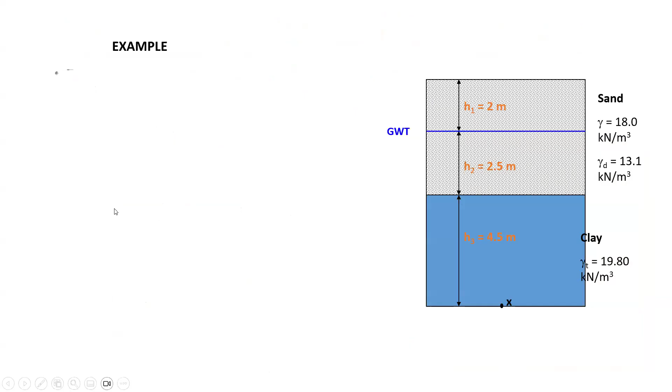Then we moved to a very important topic, the Boussinesq theory. I hope you all can remember that. So this is the approximate method, where we discussed that due to external structures, the stress distribution can be evaluated using the 2-to-1 method, or approximate method. Using this method, we can evaluate the stress at any given point below the external structure.

Actually, what we said was the results coming from this theory can still be used in civil engineering applications, but the safety factor of the result is high, so it is more conservative. The structures will be larger if we use this theory. Whatever soil improvements or conclusions are made, they will be more conservative using the 2-to-1 method. Then we discussed one of the major important theories, the Boussinesq theory.

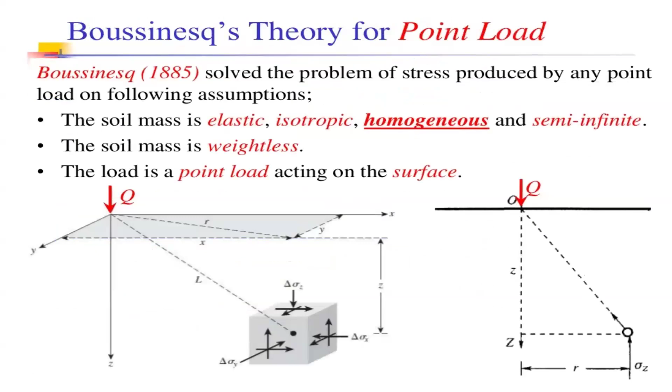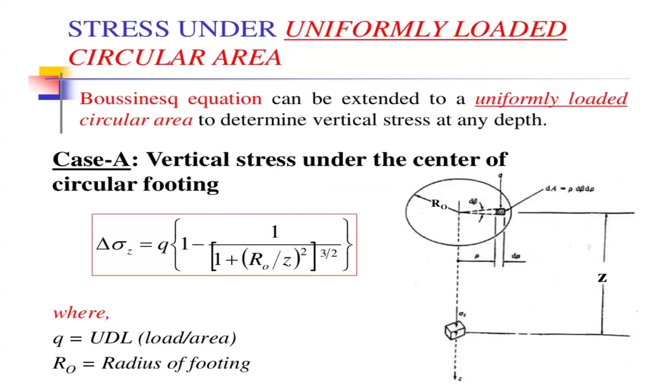So for the Boussinesq theory, we studied that it has been derived for point loads, and this is the equation for point load. Then it was further developed for line loads, and for rectangular area loads and circular area loads. We discussed all these things.

We also discussed a few examples for rectangular area and circular area as well. What I said last week was that we would discuss some examples for rectangular area loading so you get an exact understanding of this theory and how it can be applied to evaluate stress distribution below a rectangular loaded area. So today we will discuss some practical problems so you can get used to this theory, and since this area will definitely be assessed during your exam, you should have a proper understanding of it.

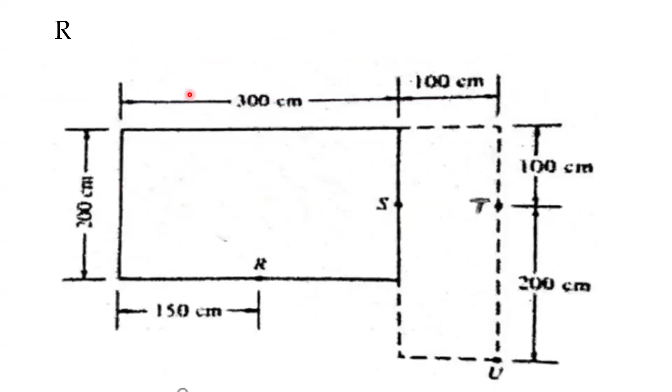So in this situation, for point R, you have divided this area into two. Our requirement is satisfied because this small rectangle has one of its corners coinciding with the point of interest. Now our requirement is okay. So what you have to do is get the dimensions of this small rectangle. The length is 200, width is 150.

So what is M? What is N? M is B over Z, and N is L over Z. Capital L is the length. So in this situation, for this small rectangle, what is L? 200 centimeter means 2 meter.

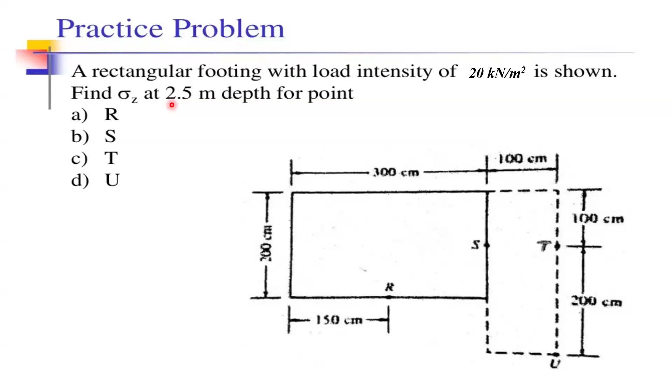So L is 2, Z here is depth 2.5, so L divided by 2.5. The width is 1.5 and Z is 2.5, that is the depth. So B over Z is 1.5 divided by 2.5. L is 2, Z is 2.5, so 2 divided by 2.5.

So if you know the M value and the N value, you have to refer to the graph to find the I value. If you know the N value, you go up until you find the corresponding M value. Once it is intersected, you go horizontally and find the corresponding I value. That's what we did here.

I value is 0.125. Applied load is 20. 20 into 0.125, that is the delta sigma Z of this small rectangle, because the dimensions 2 meter and 1.5 meter are for this small rectangle.

But here the similar dimension is available for this rectangle as well, so you have to repeat the process once again: 2 meter, 1.5 meter, depth 2.5 meter. You calculate the simple M value, the simple N value, then the similar I value.

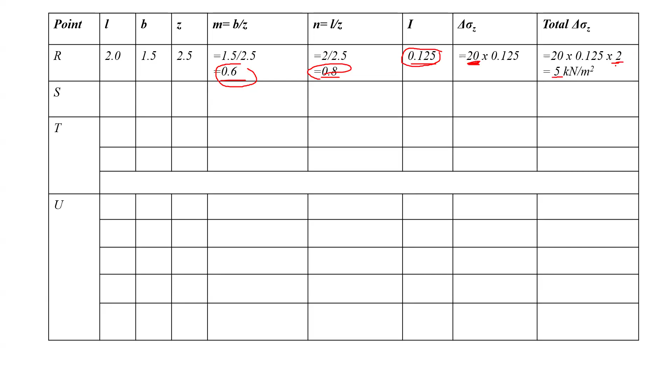Hello? Understood? Yeah sir. Then total sigma, that is multiply by two. If two rectangles, okay. Yes, actually I think my voice is not heard by you because I have been muted. Sorry, so I will repeat here.

But the problem is you have calculated this I value for these dimensions: L is 2.0, B is 1.5. This is for this small rectangle, the length is 2 meter, width is 1.5 meter. So what you have calculated is the influence value, I, calculated for a small rectangle.

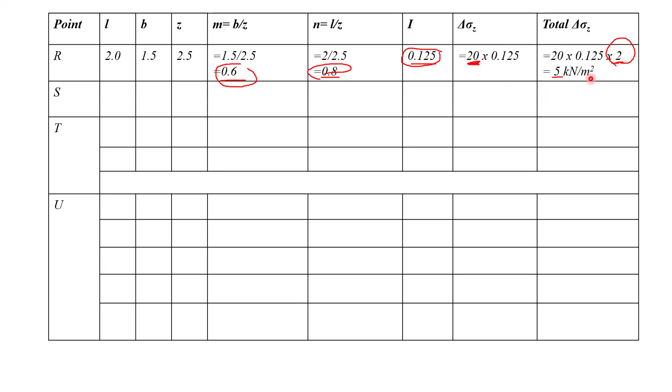That's why you have to multiply by 2. In case you don't have another rectangle, you don't need to multiply.

Our main reason to divide these rectangles is you have to use this graph in case one of the corners of the loaded area should coincide with the point of interest. But here, our point of interest is here, and the corners of the rectangle area are not coinciding with the point of interest. That's why we divided these into two rectangles at this point.

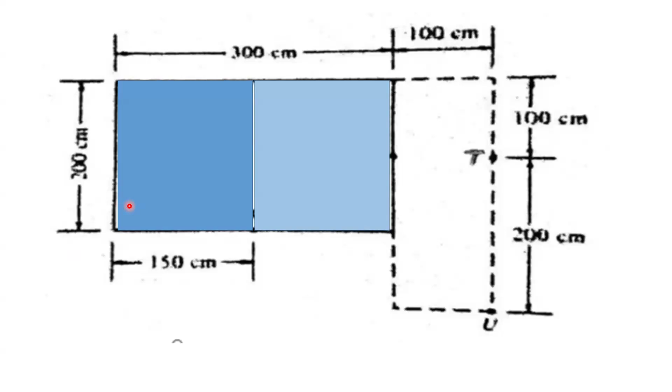Now your point of interest is point T. Your loaded area is somewhere here, which is inside. Your point of interest is outside the loaded area. So this is the plan area.

In the plan area, only this area is the loaded area. Now you have been asked to calculate the vertical stress increment somewhere which is outside the loaded area. So in that situation, how to divide? Then you have to think. So this is the way I will show you.

So first rectangle, you mark like this. Second rectangle, you mark like this. Now you may wonder why this area is more than the loaded area.

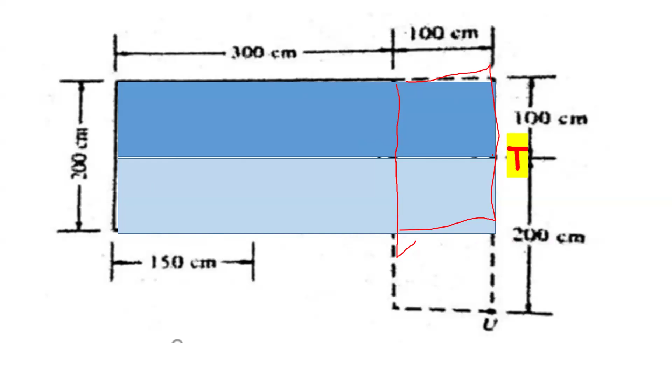So now I have additionally considered this area. So what I have to do now is deduct this area. This is the additional area which I considered, and this is another additional area which I considered.

So now what I have to do is these rectangles also should be drawn in a way that one of the corners coincides with this point T. Then only you can use the graph. So you cannot take some entire additional rectangle and then deduct it. What you have to do is, even for deduction, you have to select the rectangle in a way that one of the corners coincides with the point of interest.

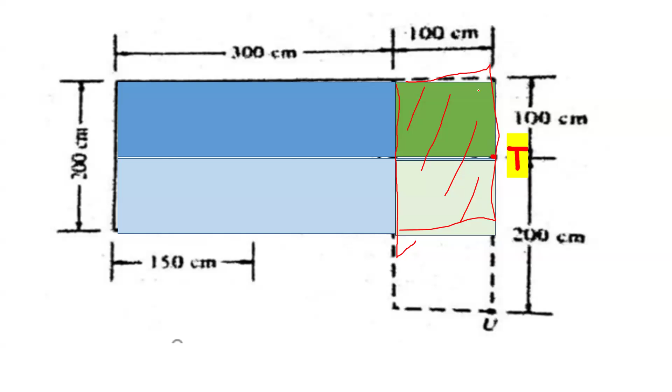Now another point, U. It is also outside the loaded area. Loaded area is only this area, no? So this is the loaded area. Point U is somewhere outside.

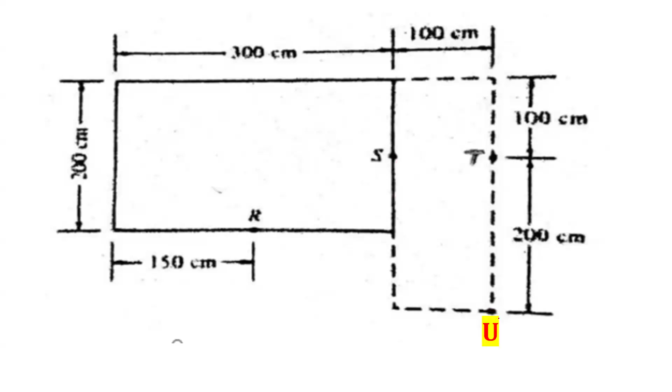So how to do it? We have to consider this big rectangle. One of the corners of this big rectangle is coinciding with the point of interest. So you simply apply the n value, the m value, and use the graph and evaluate.

Is your answer correct? No. Why? Actual loaded area is smaller than this area. So if you give the answer like that, then you have increased the loaded area, which is not the actual situation.

So what you have to do now is deduct the additionally considered area. But for the deduction also, the selected deducted rectangle, one of the corners should coincide with this point U, which is the desired point here.

So this point U should coincide with the deductible rectangle area as well. How to do that? You see, I deduct this green color rectangle, and again I deduct this rectangle as well. So that this will be the resultant.

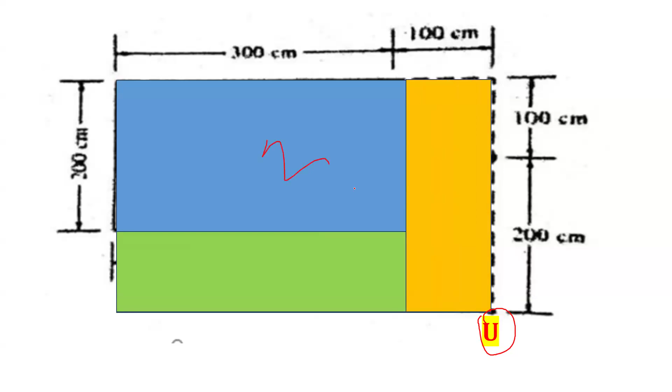Okay, my requirement now satisfactory. Before that, very first thing, I draw a big rectangle so that the corner is coinciding here. So now I know I have considered certain additional area, so now I am going to deduct that additional area.

But I have to think how to draw the deductible rectangle, because a corner of the rectangle should coincide with the point of interest. So I decided this rectangle, one of the corners coinciding with point U. Again, I draw this rectangle, that rectangle also, one of the corners coinciding with point U.

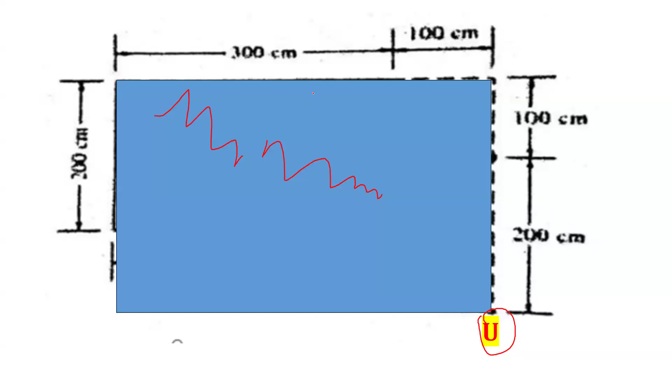Now what you have to do is, first you have to evaluate simple m and simple n value for this one and check the graph for I value, multiply by sigma so that you can calculate the sigma z. And then you have to evaluate for this small green color rectangle - check for simple length, go to the graph and find I value, and then multiply by sigma surface contact pressure, so that you can evaluate the vertical stress at this point.

So then you have to calculate for this orange color one. So that is also possible. Now what is the mistake now? Can somebody tell me, is there any mistake?

There's a mistake. What's the mistake? We have deducted this area 2 times.

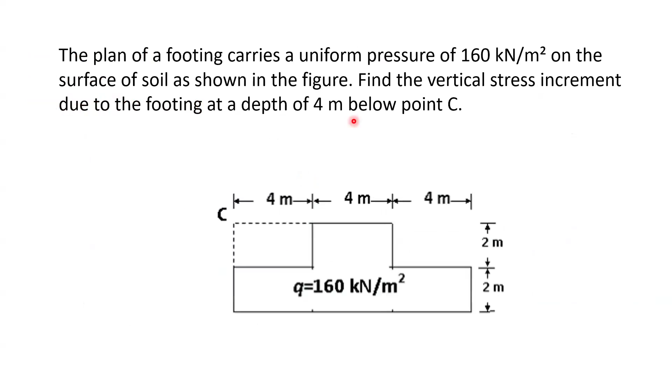What to do now? Simple M value is B over Z, and simple N value is L over Z. So L is here 12, and Z value is the depth. What is the depth? 4 meters below. So 12 divided by 4, that would be 3.

And in this rectangle, simple M value, B over Z. Simple M value is 2 plus 2, that is 4. 4 divided by 4, M is 1.

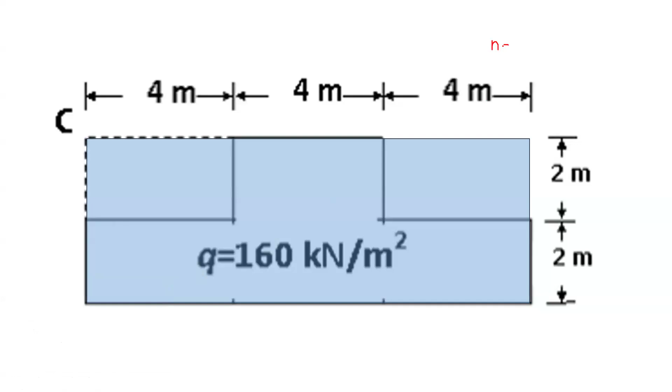Now, simple N is L divided by Z. L is 12, depth is 4. So 12 divided by 4, that would be 3.

And simple M, 2 plus 2, it is 4. 4 divided by 4, that is 1.

So if you know the simple N value and simple M value, simply you can use it at the graph. Now here, simple N value we got it as 3, simple M value we got it as 1. So you go up, up, up, up until you find the corresponding simple M value.

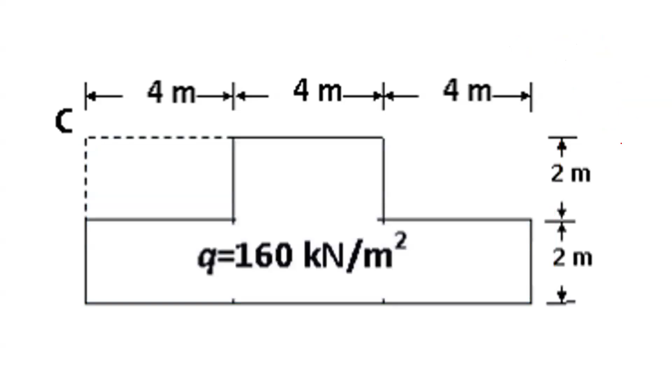0.202. Now your sigma value here is 160 kilonewton per meter squared. So now what you have to do is sigma value equals I into contact pressure, sigma naught. Actually, last week we discussed this one. So I value is 0.202 into 160. So you get the final answer.

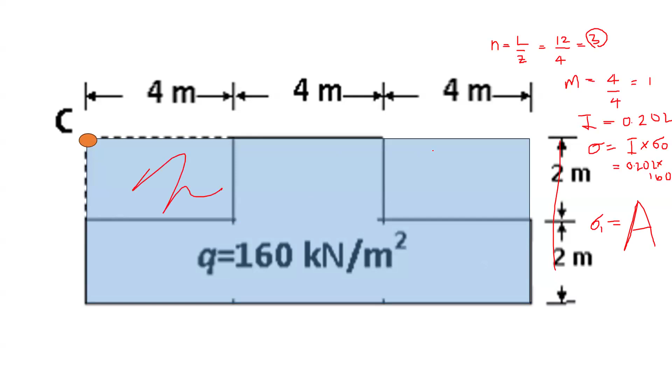Let's say the answer is capital A, sigma 1. Then you move to this one. So now from this rectangle, I know this area, and this area I have additionally considered. Now I have to think how to deduct this area. I cannot simply deduct this area, calculate m and n for this area, calculate m and n, because this area I can simply deduct since it coincides with this point. But this area does not coincide with the point of interest, point C.

So it's not possible to deduct this area alone. That's why I considered this area, the brown colored area. Now I calculate simple m and simple n value for this brown color one, repeating the same procedure. So simple n value 12 divided by 4, and simple m value 2 divided by 4. So you go to the graph and evaluate the I value, multiply by 160, and you evaluate the stress due to this brown color one.

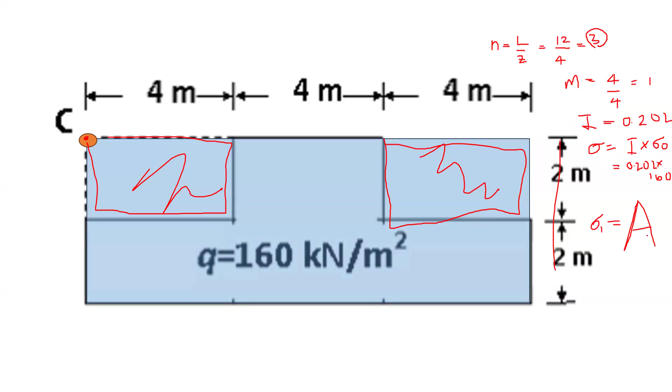So if you know the stress of this blue color area, and the stress of this brown color area, the stress coming from this blue value, let's say capital A, and the stress coming from the brown color one, let's say it is B. You have to calculate A minus B so that you can have the stress due to this checked area at point C. Due to the blue color area, the stress at point C is A. Due to the brown color area, the stress at point C is B. So you deduct A minus B to get the stress due to the checked colored area at point C.

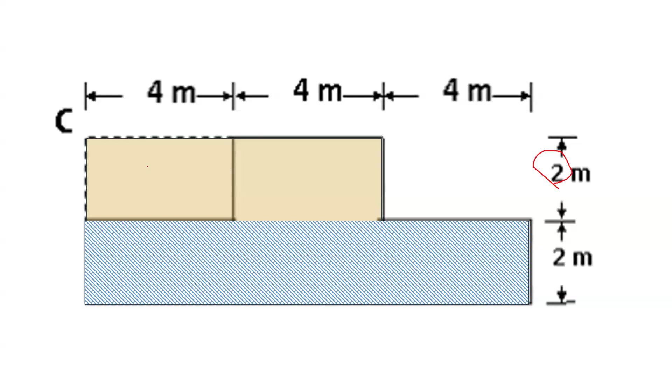Now what you have to do is evaluate the balance area, this one. So this balance area, you have to think how to evaluate. It can be done by assuming this rectangle, then evaluate simple m and simple n value. Simple n is 4 plus 4, that is 8 divided by the depth, so that simple n can be calculated. Simple m value is 2 divided by 4, so that will be 0.5. You go to the graph so that this area you can calculate.

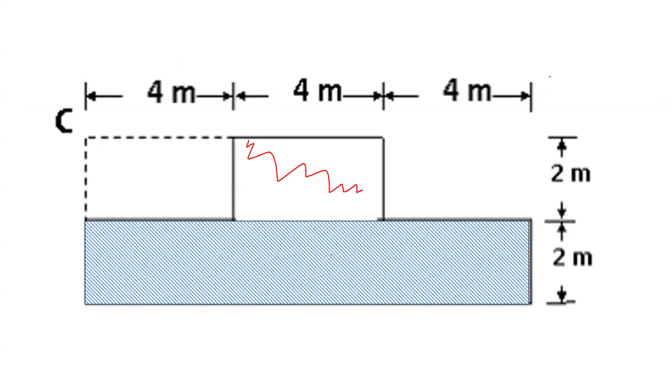But the problem is you have additionally considered this area, so that area you have to deduct. I mark that area in gray color. So this is the final outcome. First you had the blue color one, right? From that blue color one, let's say your answer is delta sigma z, that is this blue color one. So you get the answer A.

Then you deducted the top part, this brown color one, so you get answer B. And then you have the top part, this one, so you evaluate delta sigma z, that would be the answer C. Finally, you deducted this ash colored area, so the answer will be capital D. So the final delta sigma z value is of this shape, and this shape will be A minus B plus C minus D.

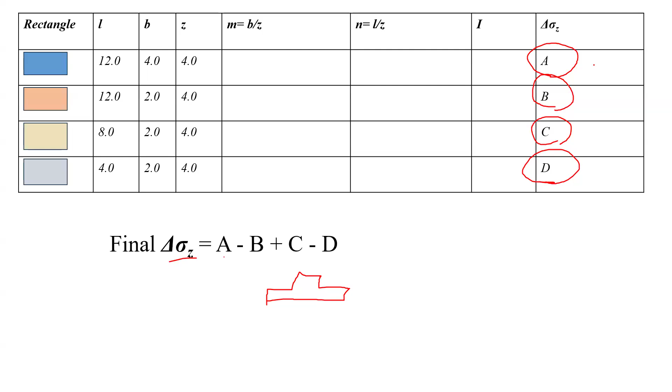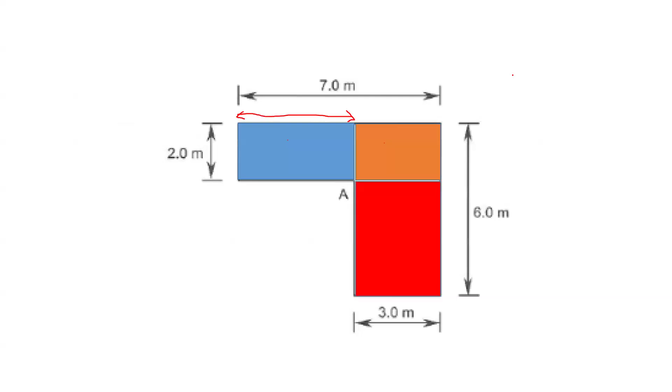Depth is 3 meters, so B over Z can be calculated. 2 divided by 3 is 0.67, and length divided by Z is 4 divided by 3, which is 1.33. So you go to the graph - if you know the n value as 1.33 and m value as 0.67, you can go to this graph and evaluate the corresponding I value. I multiplied by the surface contact pressure, that is 200, so I multiplied by 200 would be the answer A.

And the other area - what is the dimension? Length is 3 meters, width is 2 meters, depth is again 3 meters. So evaluate M value, N value, and I value to get the final B value. Then we have another area, the red colored area - length is 4 meters, width is 3 meters. So evaluate M value, N value, and I value, and finally you can evaluate C.

I don't have much time, that's why I just mark A, B, C. When you have time, I will upload this presentation in your Moodle so that you can refer to this presentation and evaluate these stresses by yourself.

So when we meet next week, come with some questions if you have any doubts, so that we can discuss those things during the lecture.

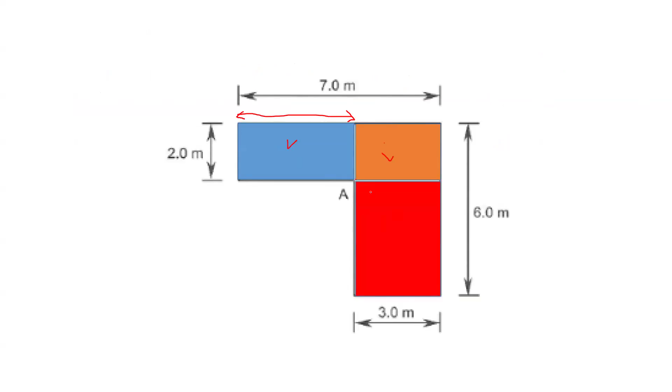So if you know the A, B, C values, how do you combine them now? No need to deduct - if you add this area and this area, you can combine the total area, you get the combined total area. So for the stresses also, what you have to do is add A plus B plus C, then you can find the final sigma Z value. There's no multiplication, no deduction, only addition. Everything depends on how you divide and how you draw your rectangles.

Okay, understood. Is it clear, Udeshika? Yes sir. Asha? Clear, no? Right, okay.

Let's move to the other example. This kind of question was there in your previous batch exam paper. For the figure, calculate the stress increment due to the shown foundation under points 1, 2, and 3. There are 3 points given, so you have to calculate for every point, knowing that the required depth is 2 meters and the surface loading is 200 kilopascal.

So everything is given. Let's consider point number 1. When you consider point number 1, you have to decide how to evaluate the rectangles. So let's try.

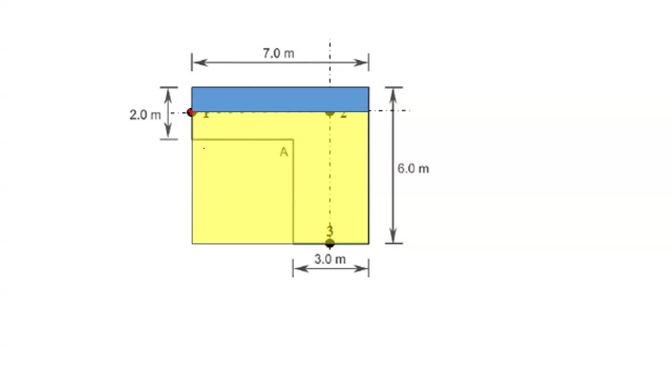This is the rectangle arrangement. The blue color one, definitely we have to go for - this blue color rectangle, without issue, we can use it. Then I draw another big rectangle, the yellow color one. What I have done is made my logic where the point of interest coincides with the corner. But additionally, I have considered this extra area. Now I have to think how to deduct this area.

So how to deduct? I will consider a big rectangle and deduct from it. Let's move to the other slide. So I deduct - I need to remove this area. So how to do it? I deducted this rectangle, you see - there was a rectangle, this yellow color rectangle was there. So I evaluated simple m and simple n value.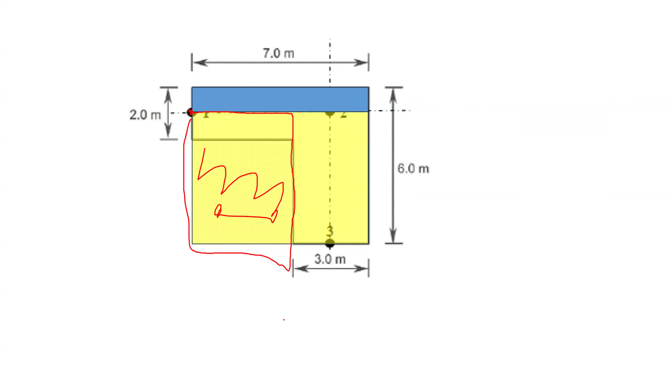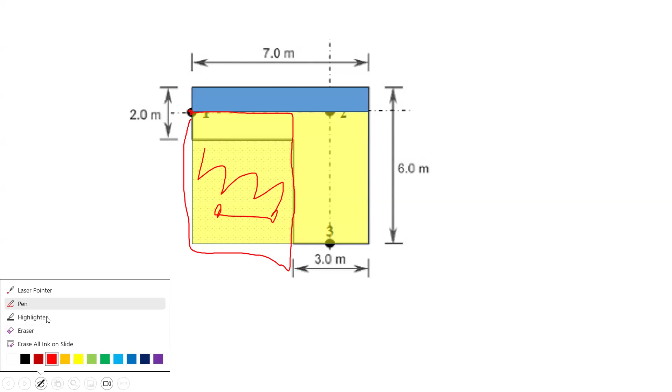Okay, now the blue color rectangle I considered and yellow color rectangle I considered, but this dotted area I have additionally considered. So now I'm going to deduct this area, but I cannot simply deduct this dotted area because one of the points is not coinciding with the point of interest. So I need to deduct a rectangle where a corner is coinciding with the point of interest. That's why I deducted this entire area, so that this point of interest will be coinciding with each other.

Now what happens? The result will be, now we receive this area and this area, because we deducted now this area. So that means we receive this area and this area only. Now it is very easy. This area we can additionally consider because one of the corners is coinciding with the point of interest. So this area I have additionally considered, the ash colored one. So now the evaluation is like this.

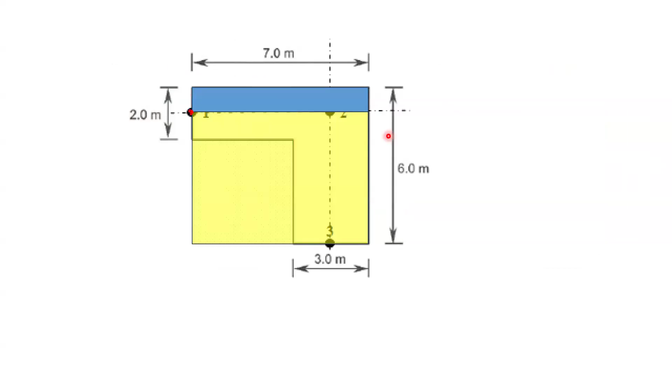And I have additionally considered this yellow color area, right? So that area also, you know the dimension. Here it is 1 meter, from here to here it is 5 meters, and from here to here it is 7 meter. Length is 7 meter, width is 5 meter, depth is 2 meter. So m and n can be calculated, I value can be evaluated, so that sigma z can be evaluated.

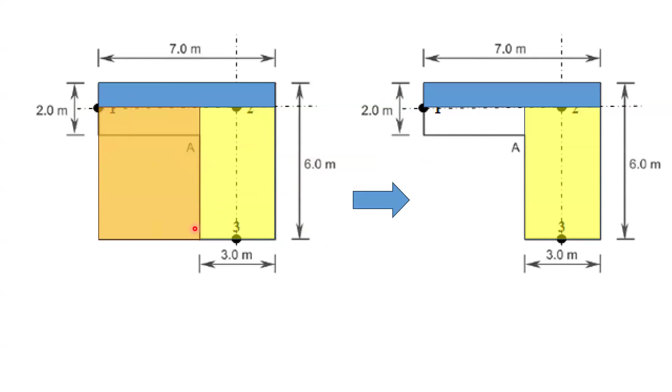So now we have this area, so this area we have to deduct. Anyway, now the dimensions are: here we have 4 meter, here we have 5 meter, width is 4 meter, length is 5 meter, depth is 2 meter. You evaluate the n value so that I value can be found.

And then additionally you consider this ash color area. So that ash color area, simple L, simple B and Z values are given so that you can evaluate the I value. Finally, once you receive these A, B, C, D values, how to get the final delta sigma Z? This blue color one definitely should be there, and then you add with the yellow color one. But you have to deduct this area in order to omit the additionally considered area. And finally, you have to add this rectangle area. This is how you have to find the final delta sigma Z for this situation.

Is it clear? Asha, clear? Ranmini? Yeah sir, clear. How about the others - Sandamali, Vijayakon? Everybody - yes, sir, it's clear. Okay, right?

I will show you one of the examples which I gave for your previous batch so that you can understand to which extent I am expecting your knowledge. At the end of this session, I will show you an exam paper.

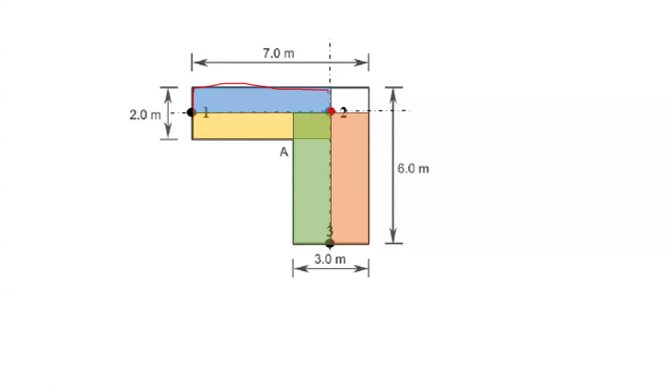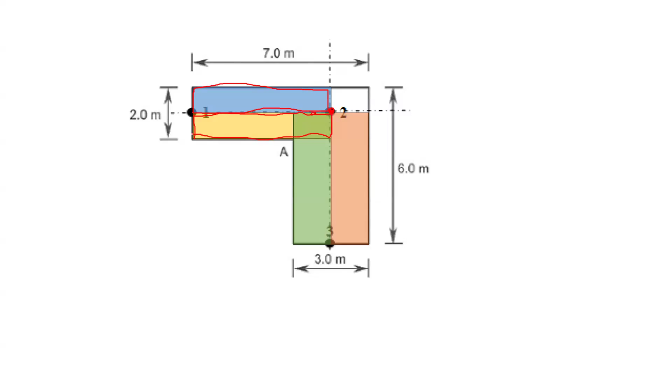This is my first rectangle, blue color one. Then I created another rectangle in this orange color up to here. And I created another rectangle like this, right? So every rectangle which you consider should coincide with point number 2, that is the requirement. Another rectangle I will create like this, right?

So now the problem is I have not considered this area, and I have additionally considered this area twice. When I consider this orange color, we have considered this small area, right? When we consider this green color area, this area is also counted once again. So that means the area here and here, it is similar.

I don't need to consider this area additionally. The reason - the similar area I have counted here twice, so even though you deduct this area and add this area, it is similar, right? You can do like that, you can deduct this area and again you can add this area. No point, it is same. So because of that, I will not consider this area because I have considered this area for 2 times.

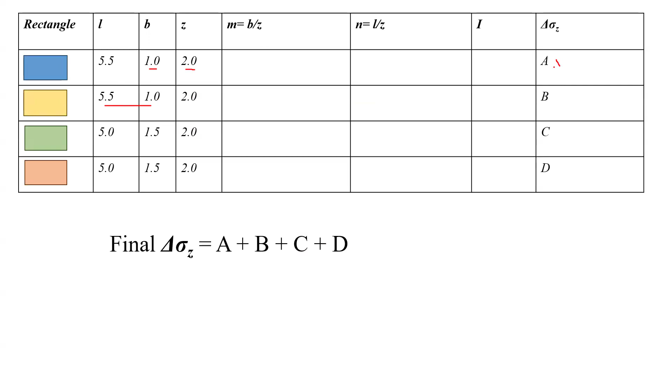Now go for the orange color one. For the orange color area, the same length and same width apply, same as before. So actually no need to calculate once again because the same thing is here - you can calculate once again as another step, or else multiply A by 2, since these dimensions, L and B, are the same.

M values are similar, simple N values are similar, so the graph I values are similar, surface pressure is similar, so the final delta sigma Z value is similar. So no need to calculate the B value separately - once you calculate A value, no need for another step, you can multiply by 2 to evaluate the combination.

Similarly for the other one, the green color area: 5, 1.5 Z value, evaluate the delta sigma Z value and multiply by 2. No need to go for another step for this one because the dimensions are similar - these two dimensions are similar, so M values are similar, N values are similar, I values are similar. No need to calculate this step; once you evaluate this one, you can multiply by 2.

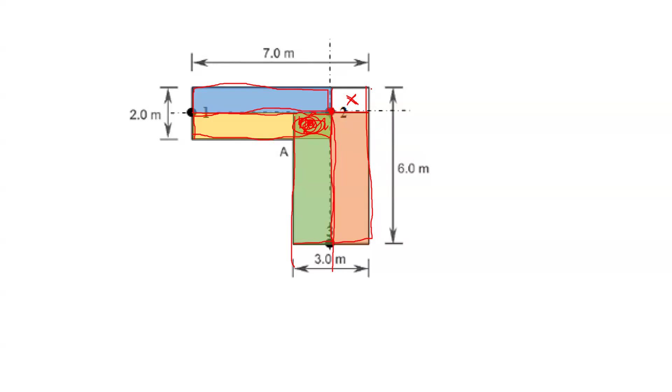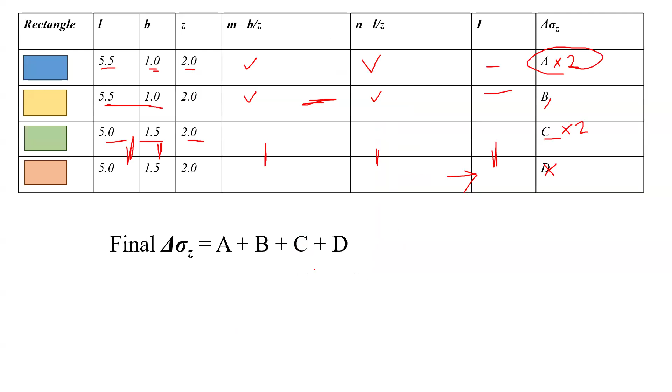I hope the others also got the idea, right? So with that, we will move to the other session - that means we now have loading systems. This kind of problem is also possible in your exam paper. What happens here: a loading system with a point load, two line loads, and an area load - this kind of combination. So how to do it? Like this.

A point load is here, and the dimensions to the point of consideration are given. This is our desired point, and from there we have to go down 3 meters. Accordingly, you have to evaluate the vertical stress increment due to this loading system - there's a point load, a line load, another line load, and also an area load. As a result of the combination of this loading system, what is the vertical stress increment at point A? That is what needs to be evaluated. So how do we do this kind of problem?

Actually we discussed these kind of problems in our last lectures, so I will remind you how to do this. The Boussinesq theory, as I discussed last time, has been evaluated for point loads. The developed equation is this one: delta sigma Z for any given point due to a point load will be given by this equation. The applied load is capital Q, for the considered depth Z, and the horizontal distance from here to here would be R, and again Z. So these are the things you need to know: Q, Z, and R. If you know Q, Z, and R, you can evaluate the delta sigma Z value.

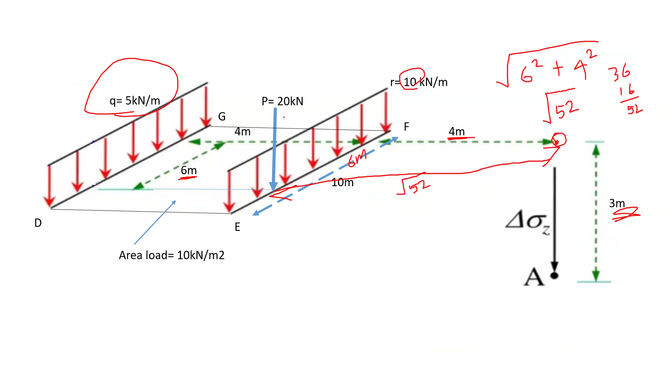And then you need to know the X value, the horizontal distance. What is the horizontal distance? Now this is where the line load is, and this is the point of interest. So what is the horizontal distance? 4 plus 4, totally 8. So X value is 8.

As you know, pi is 3.142. Now every unknown is known, so you can evaluate the vertical stress increment due to the 5 kilonewtons per meter load. You can evaluate it the same way.

Now for 10 kilonewtons per meter, for that one also the same procedure applies. The difference is the horizontal distance, that is 4 meters only. So you can evaluate the vertical stress increment due to the line loads as well.

Now the remaining one is the area load. So you have to evaluate for the area load. When you see it on the plan view, it is a rectangle. Very simple, now you know how to do the rectangular loaded area. This is the plan view of the same figure. So 4 meter, again 4 meter is 8 meter total length. This is the point of interest.

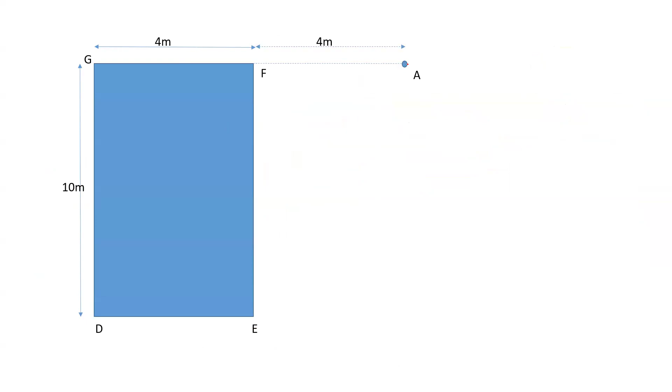How to evaluate? You have to draw a rectangle having a corner of the area coincide with this one. So first you draw a rectangle like this and deduct this by an additionally considered rectangle. Very easy. So first you have to evaluate the simple m and simple n value for this one. What is simple m value? What is simple n value?

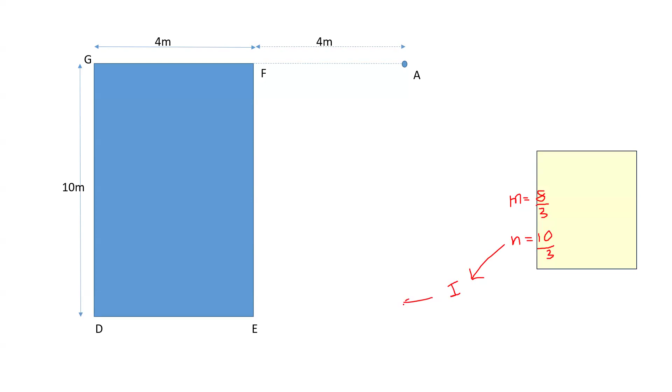You know that simple m is 8 divided by 3, where 3 is the depth. Simple n is 10 divided by 3. If you know the simple m and simple n values, you go to the graph and evaluate the I value. If you know the I value, you evaluate the delta sigma z value. So again, what you have to do is additionally consider this here. This is point A.

Actual loaded area is only half of this, so this is only the loaded area, but you have additionally considered this area. Because of that, in this additional loaded area, you deduct. So how to deduct? You calculate for this simple m and simple n, again calculate for I value, and then evaluate the delta sigma z value.

So deduct from this one: delta sigma 1, this is delta sigma 2. So delta sigma 1 minus delta sigma 2 will be the final value. So what is the final total vertical stress? It is like this.

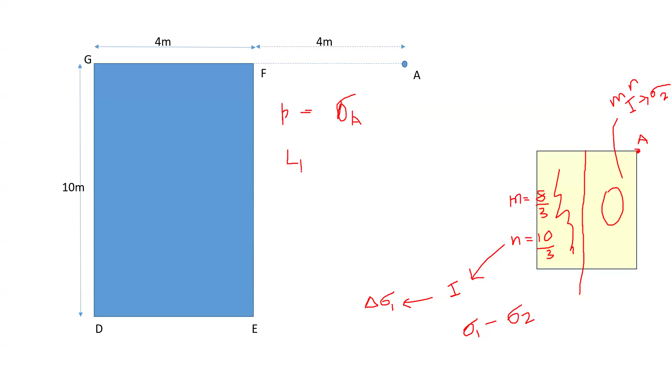You know the vertical stress increment due to the point load, right? So the point load delta sigma A, then line load 1, 5 kilonewtons per meter, that is sigma B, line load 2, sigma C, and area load, we have sigma D.

So the final total delta sigma will be sigma A, the point load 1, plus sigma B, line load 1, and then sigma C, line load 2, plus sigma D, this area load. Okay, so this is how you evaluate for the loading system.

Individually, you calculate for the stress increment due to the loading. First, you calculate for the point loads, then you calculate for the line loads, then go for the area load, and then evaluate the total sigma value. Okay, is that clear?

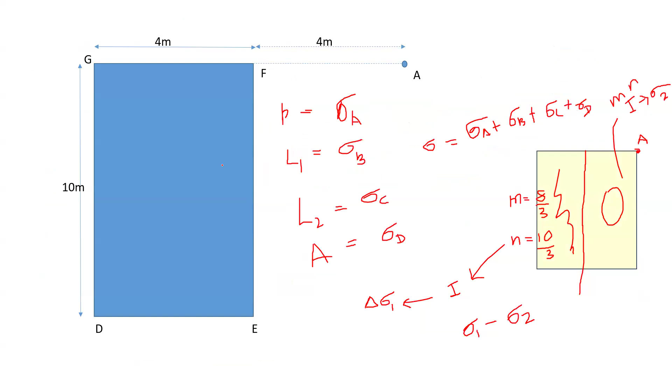Okay, so this is another example, right? These kind of problems are also possible in your exam paper, right? I don't know from which area I'm going to make a question this time, but I will show you some of the examples in the past papers. So similar kind of questions can be expected in your exam paper, right?

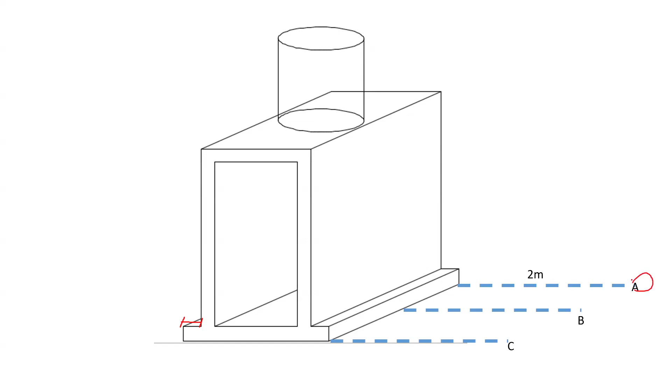And then what happened here now? There is a water tank. As a result, we can idealize the water tank load as a dead load here. So that dead load is given in the question, and base slab dimensions are there, wall dimensions are there. It is made out of grade 30 concrete, so every information has been given. So what I am asking now: first you have to evaluate what are the loadings coming from this arrangement, and then as a result of those loads, what are the stress increments at point A, B, C, and also at the center of the base slab, somewhere here. So kind of practical problem, right? Because every structure as civil engineers, we create on the ground, so these are the practical situations, right?

So now let's calculate without taking much time. At the roof area, we have a water tank. It is given in the question that the load due to the water tank is 3 kilonewton per square meter.

Load due to the water tank roof self weight: the concrete unit weight is 24, and the thickness of the water tank roof slab is 150 millimeter, so the load coming from the water tank roof slab is 3.6 kilonewton per square meter. Total area load from the roof is 3 plus 3.6, which is 6.6 kilonewton per square meter.

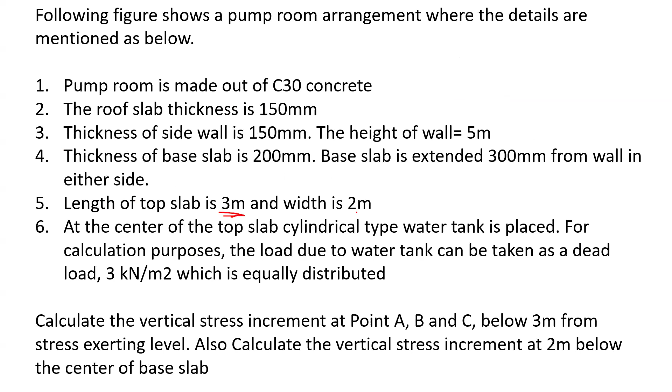Load acting on the wall due to the above area load from the tributary area method: the length of the roof slab is 3 meter and the width is 2 meter. So 6.6 into 2 gives the total line load, divided by 2, or multiplied by 0.5, because there are two walls supporting this roof slab. So the final value is again 6.6 kilonewtons per meter.

This is the line load acting on the wall due to the water tank and the self weight of the water tank slab. Then there's dead weight of the side wall also: 24, the unit weight of concrete, into 5, the height of the wall, into the width 0.15, which gives 18 kilonewton per meter. So total line load in one wall is 24.6, the addition of these two.

So now the line load you know. The loads have been calculated up to here. The line load from here you evaluated. Balance is this base slab area load, which you have evaluated up to here. Base slab: 24, the unit weight of concrete, into this thickness, so the area load is 4.8 kilonewton per square meter.

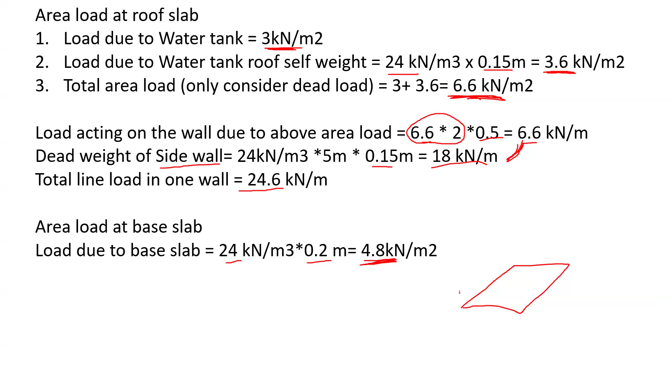So what is this now? Area load plus there is one line load here and another line load here. So what you are asked to calculate is, 2 meters away due to this loading system, what is the vertical stress increment at point A and point B somewhere here, point C somewhere here, and at the mid of this area.

For line loads, it's very clear. These are the equations, and the Q value you have calculated: Q is 24.6 kilonewton per meter. The Z value is given in the question, and the X value you can evaluate, because per line load what is the distance, it is there, and the Z value is there. So for the two line loads it is very easy. Similar to the previous example, I am not going to discuss this in detail. So Q value you know, Z value you know, X value you know, so you can evaluate the sigma Z value for both line loads.

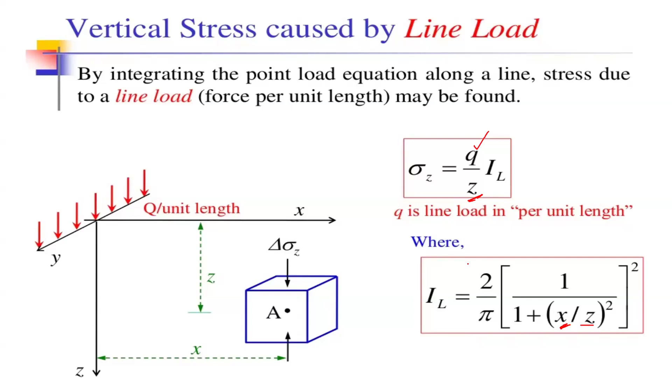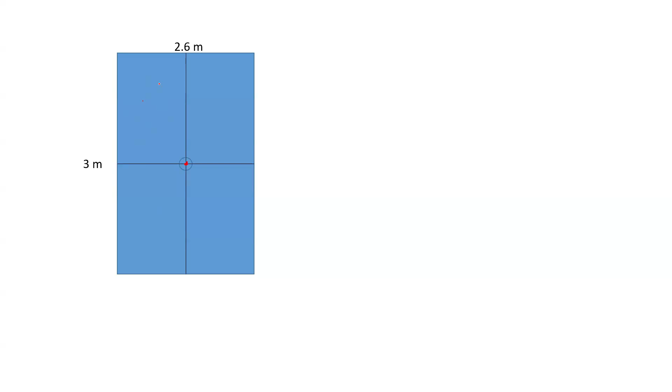In the case of area load, for the center it is very easy. You have to divide this base slab area into 4, and again that divided area is also a rectangle, so you can evaluate the simple M and N value for this small rectangle and multiply by 4, so that you can evaluate the vertical stress at this point at the center.

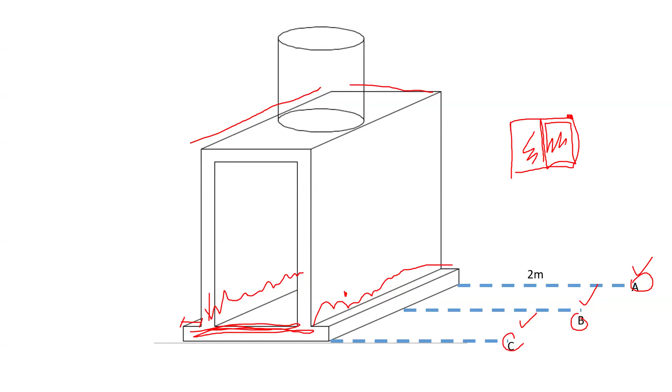Now, in case of area load, there's another question: you have to evaluate for point A, B, and C. So what should be done by you? You have to consider an additional area. Let's say this is only the loaded area, so you consider certain additional area like this for this point and deduct this additionally considered area. I don't think it is very difficult for you, because we discussed some more complex problems than this previously. So the evaluation of area loads, I don't think it will be an issue this time.

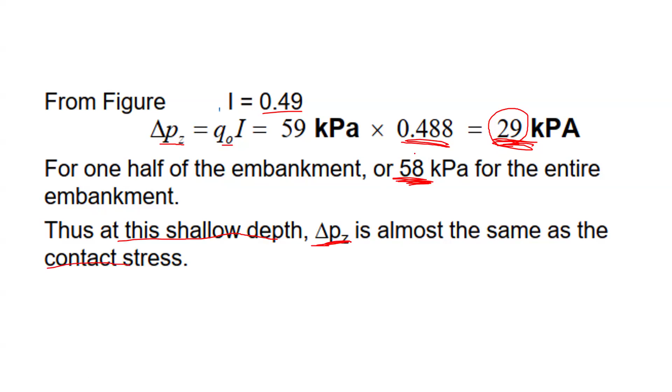So that's why I mentioned, at this shallow depth, this delta PZ, the vertical stress increment, is almost same as the contact stress. Contact stress is 59, and here you can see 58 at 3 meters. Nothing much different. But when you go down 6 meters, the problem will be different.

You can see the A over Z value now becomes different. Previously A over Z was 6 over 3, now it becomes 6 over 6 because the depth is 6 meters. Similarly, for B over Z value can be calculated. So from the graph, as referred previously, I value can be calculated as 0.44. So for the final value, 59 into 0.44, and because there are two equivalent trapezoids, you have to multiply by 2. The final value is 52.

So you can see even at 6 meters down, the value will be much closer to the contact pressure. Hope you understood this trapezoidal load case.

So what we have done, we considered a point at the center, that's why we multiplied by 2. But if in case we considered some other point, this is the case we discuss, point A. In case of point A, very clear, you can calculate this for this part and multiply by 2, if it is equal.

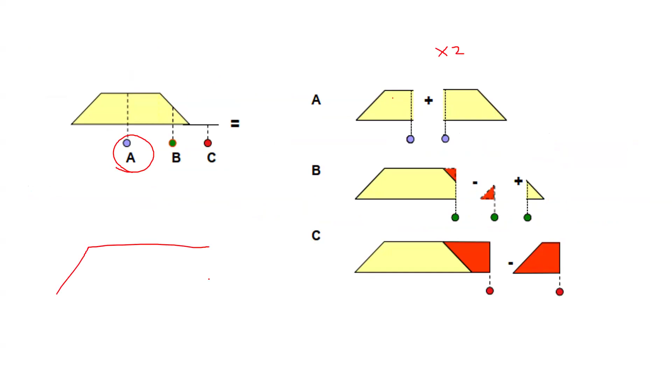But if in case, let's say this is your trapezoidal area, and your point of consideration is somewhere here, which is not at the center, in this situation you cannot multiply by 2, but you know the B value for this one. So the B over Z value can be calculated, A over Z value can be calculated, and you can evaluate the I value, and then you can evaluate the delta sigma value.

Here also, you can evaluate a B value for this one, another B value, not the same value, and the A value also you can calculate. So A over Z and B over Z can be calculated. For this small trapezoid also, you can evaluate the I value and delta sigma Z value, and then add them together. That is possible.

But if you want a kind of point B, what is the situation? So in this situation, for point B, you consider a trapezoid like this, so that A value, B value, A over Z value, B over Z value, and then I value can be calculated. That is easy. And you have to deduct this additionally considered triangle, and again you have this particular small triangle also, which you have to add.

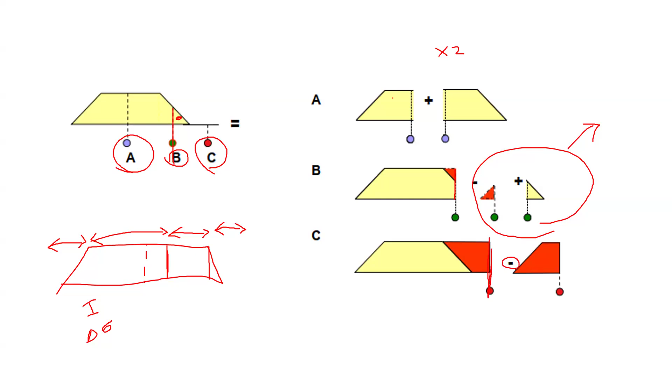In case of point C, what will happen? So the trapezoidal loaded area is somewhere here. Now we are considering point beyond the trapezoidal loaded area. So in this situation, you have to do like this. Our beyond position will be somewhere here, so we consider our trapezoidal up to here. That means we have additionally considered this area, which is also a trapezoid. So that trapezoid we can separately evaluate, and that impact we can deduct. So deduction will be applicable. Hope you understood, clear?

Right? Asha, is it clear? Asiri, Udeshika, Samarajiva, is it clear? I don't know whether it is clear to you, so if you have any question, please let me know. If you don't have any question, we will proceed.

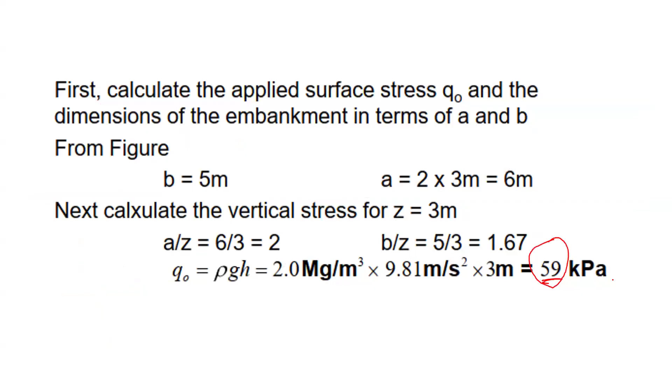in line with the graph condition. Graph condition, it should be horizontal when the point is considered. The loading area should be horizontal. But in this situation at point B, the loading area is not horizontal at the point of consideration. So at the point of consideration, this loading area is not horizontal, so it is a kind of triangle, right?

So because of that reason, we have to consider a red color triangle area additionally to make the graph condition, and then this area we will deduct from this area, and then yellow color area we will additionally consider, right?

For point number C, it is not at all in line with the graph condition. So we make that situation into the graph condition, where we additionally consider certain area in red color, so that it lies with the graph condition, and this additionally considered area we will deduct, right? It is also a trapezoidal area.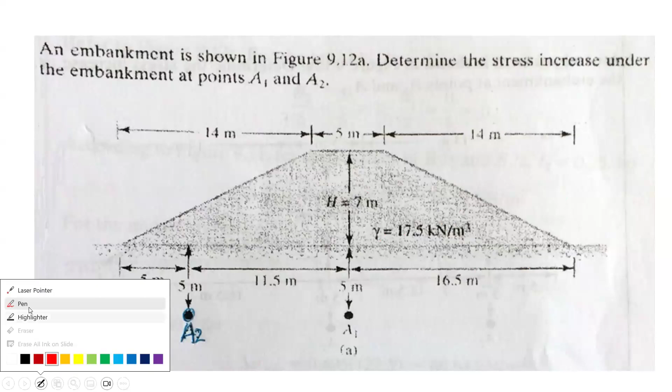Okay, right. So with that, I have a question here. An embankment is shown in figure 9.12. It is this one. Determine the stress increase under the embankment at point A1 and A2, right? A2 is here, A1 is here.

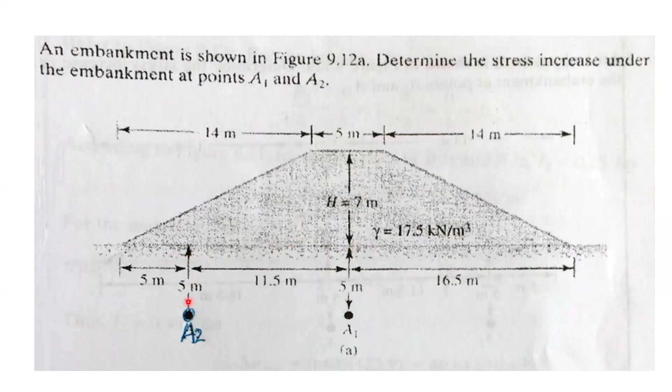So what you have been asked was, as a result of this loading, you have to evaluate what is the vertical stress increment at point A1 and A2. So here, this is the bottom of the embankment, so you have to consider 5 meters down, here also 5 meters down. So you go for the graph which we discussed a short while ago and evaluate for this one, right?

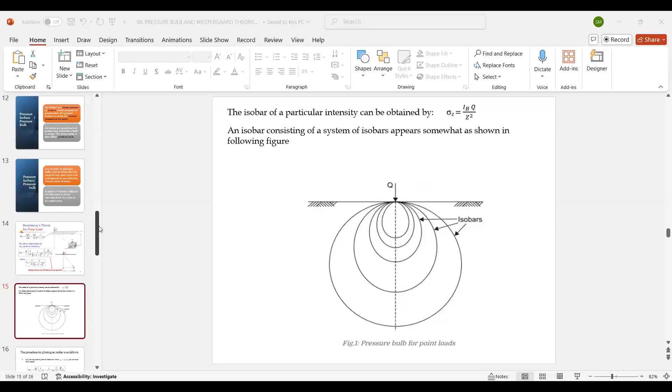these questions if you have any doubts in the next class, right? So with that, we will be now moving into today's balance part of the session, right? Okay, so I'm having a short session with you, that session I'll try to complete within today. I don't want to complete the full presentation, but I need to complete this Westergaard's theory with you, right?

So this Westergaard theory, actually it is more or less equal to the Boussinesq theory, same assumptions, but this theory has been developed for practical situations. Practical situation means, hope you can remember, in the Boussinesq theory we have considered several assumptions: the soil is homogeneous, soil is elastic, soil is isotropic. Likewise we have considered many assumptions, but such kind of situations are not available in practical situations.

So you can see many layered soil, so it is not a homogeneous soil in practical situation, right? So whatever decisions coming from the Boussinesq theory may not be fully applicable for practical situation. So to evaluate this situation, Westergaard has developed his own theory to evaluate the vertical stress increment under a given point. Now we are going to check that theory in your course.

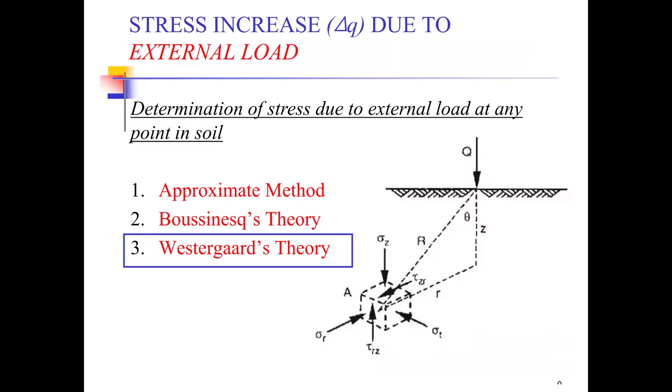Okay, right, so now we discuss about the approximate method, orally we completed, right? So we discuss about the Boussinesq theory that is already completed, now we come to this Westergaard method, right? The reason, as I said, Boussinesq theory derived for homogeneous, isotropic, linearly elastic half space.

But many natural soils are sedimentary in nature, right? Like layered, so this homogeneous situation is not available in practical situations. Most of the soils available in the world are not homogeneous because those are in layered manner. So Westergaard theory considered infinitely thin elastic layers of soil. So we do not consider this as homogeneous, we consider there is layered soil, right?

But we consider linearly elastic nature, understood? Westergaard considered the elastic principle as it is, but he has changed from the Boussinesq theory this homogeneous property, which is highlighted and I underline here. That property, he understood it is not naturally available, it is we have a layered soil. So because of that, that property he has changed in his theory as a layered soil.

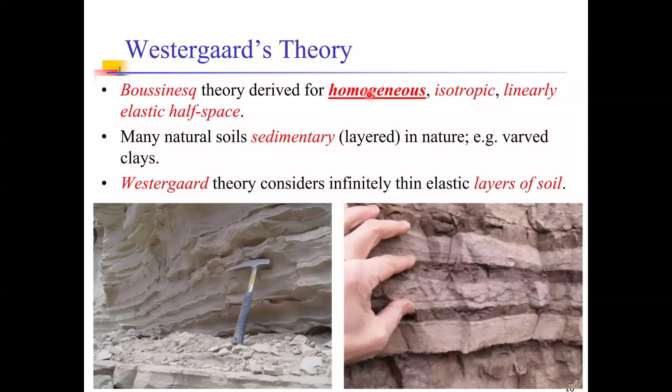Okay, so remember those things, in 3-mark questions, 2-mark questions, those kind of questions can be available. So I may ask why Westergaard theory, what is the difference between Boussinesq theory and Westergaard theory, what in assumptions, what they have assumed differently than the Boussinesq theory. Something like that I can ask, so you need to understand those principles well.

Okay, right, so the Westergaard theory for point load, we will consider the point loads only. So in that situation, this is the equation developed by Westergaard, right? So you can see the mu, the Poisson's ratio of the material, has been considered and it is incorporated in the equation. So Westergaard has incorporated

the layered nature, each layer there is a mu factor, mu means the Poisson's ratio. So the Poisson's ratio will be governed in this equation, everywhere it is available with mu value. But for our comparison purposes, we will consider this mu value as 0. If the mu value is 0, what will happen?

If you substitute the value mu as 0, this equation can be simplified to this equation. So when you substitute 0 for this mu value, this equation will become this equation. If you can remember, the Boussinesq theory also had this kind of equation, so it is more or less similar. We will compare these two values with this arrangement.

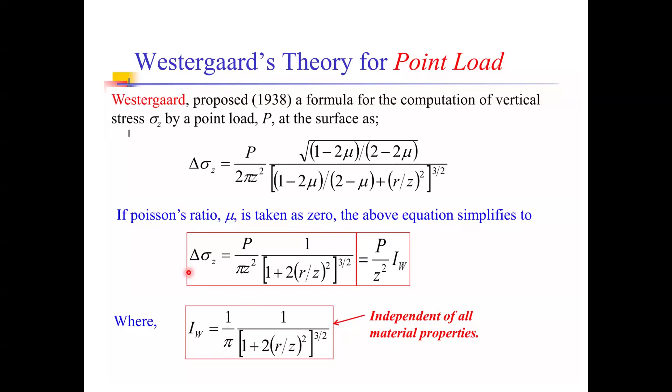That means if you use the Boussinesq theory, the Boussinesq solutions will give you a safer value compared to Westergaard theory. You see, it always gives the higher value, for shallow depth, lower depth. But if you go to the higher depths, what will happen? The two values will coincide with each other, it is more or less similar. So IB and IW become more or less similar, and finally it will be closer to 0.

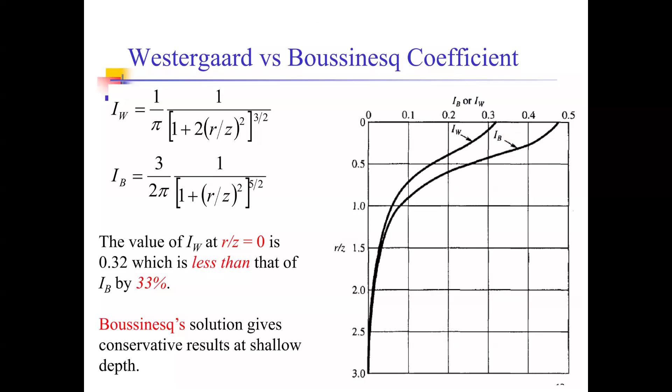Understood? Okay. Right, now.

As I said, similar charts are available, but the values are different. The results from Westergaard chart and Boussinesq chart are different, but same principle, same arrangement, same way of reading the charts. So if you know the Boussinesq theory charts, you can go for Westergaard theory without any issue. But you have to always remember the Poisson's ratio has been taken as 0 in developing this chart.

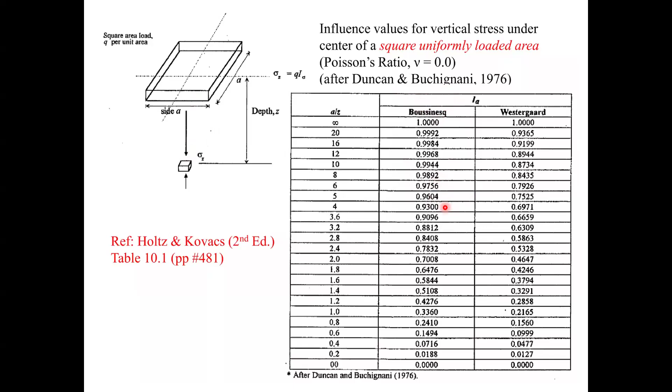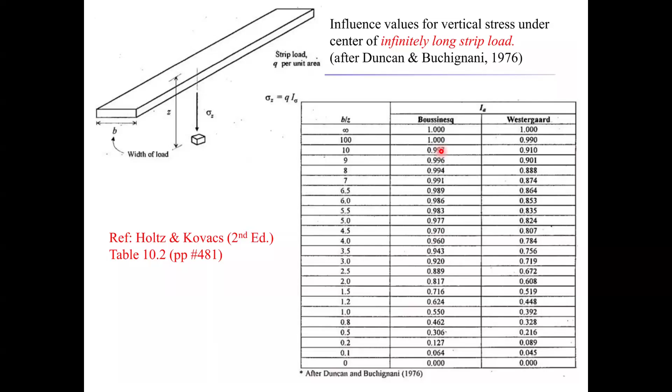So the summary: we have been discussing approximate loading method, Boussinesq theory, and Westergaard theory. In Boussinesq theory, we discuss the IB value. The difference between the Boussinesq method and Westergaard method is the IB and IW value. IB value is given by this equation, IW value is given by this equation. We compared and found that Westergaard values are always lesser than Boussinesq's values, so it's better to use Boussinesq theory compared to Westergaard theory. The difference is that we compared the actual situations: Boussinesq theory assumes homogeneous soils, Westergaard method considers layered soil. To compare these two equations, we assume mu as 0 in Westergaard method. When we compare this method, we always observe IW will give you a lesser value. Hope you understood, is there any problem up to now?

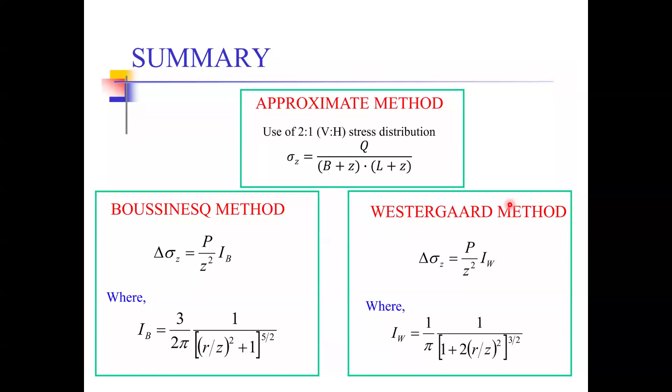So next week, we are going to discuss about pressure isobars. We will be discussing about this theory.